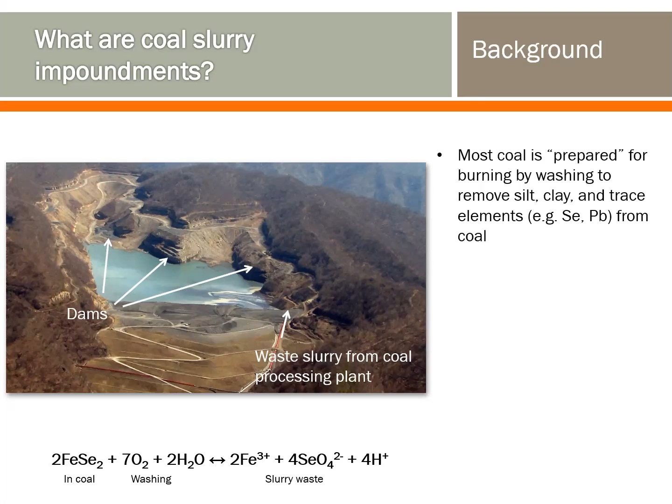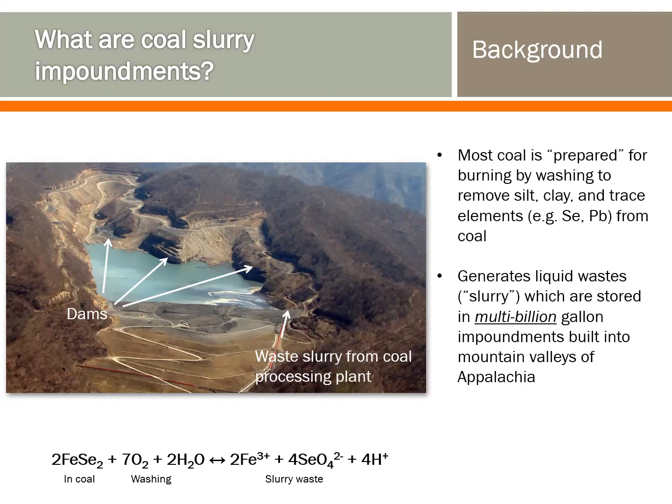And this whole process generates a huge amount of liquids, multi-billion gallons, which is easily set into these impoundments. So there are more than 700 impoundments in the Appalachian region of the USA, in particular Kentucky, West Virginia, Ohio, and Pennsylvania. Here you can see a satellite image of coal slurry impoundment positions in the USA.

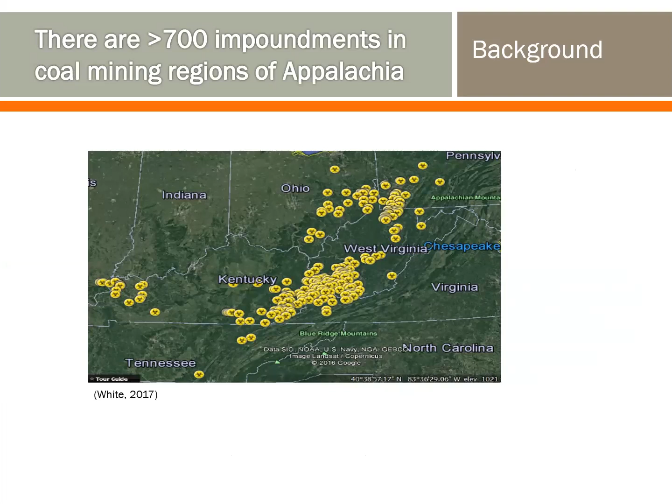So why do we care about these coal slurry impoundments? There is a photograph of West Virginia where you can see these impoundments are usually built very close to where we live. And these impoundments contain some bad elements like, for example, arsenic, selenium, and lead. Here I stated that the selenium is usually much higher than the water quality standard recommended by EPA for lotic systems, which is 3.1 ppb.

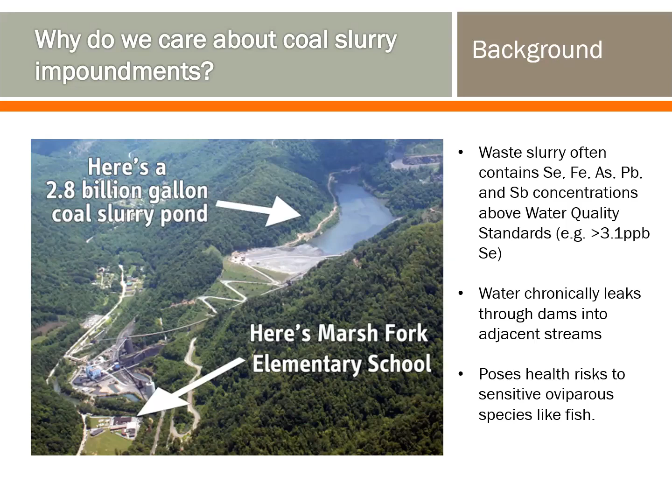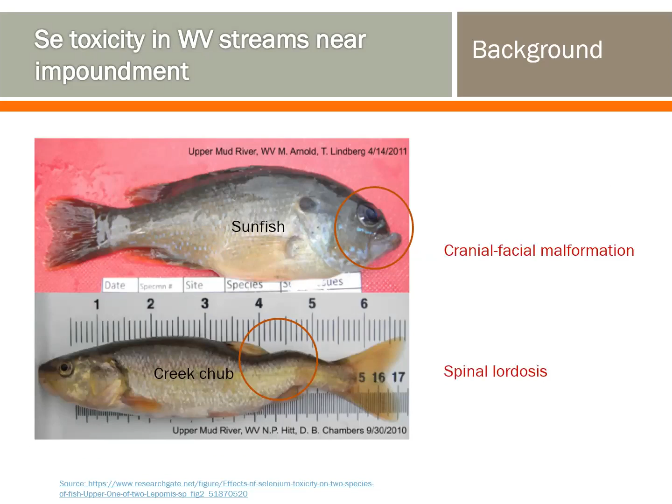Water chronically leaks through the dams into the adjacent streams, which usually poses health risks to sensitive oviparous species like fish and birds. Here is a photograph where you can see selenium-induced toxicity, more particularly due to oxidative stress, for sunfish and creek chub. We see facial and spinal malformation.

So what would be the possible solution for that? The PAB system, which has been used for more than 25 years to remove nitrate from agricultural tile drainage by denitrification. Here is a picture of the process, how in field conditions we can build a PAB system. Step one, excavate the trench and line it with an impermeable membrane. Step two, fill it with organic matter, for example, wood chips. We can use Timothy hay also. And cover with liner, and then cover with soil and vegetation.

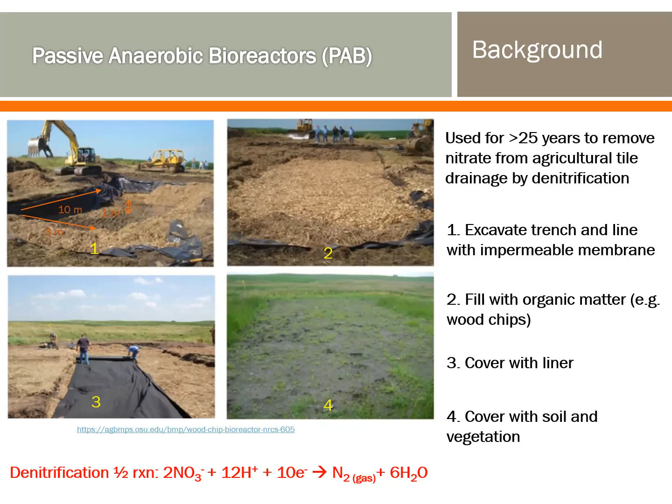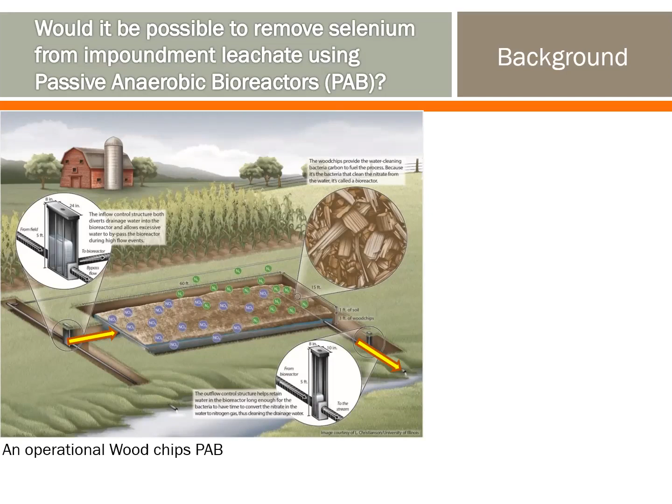Here is a nice illustration of an operational wood chip bioreactor. At the left yellow arrow, you can see the influent coming in, and at the right yellow arrow, you can see the effluent going out. The main advantages of this system are no energy and maintenance cost, minimal wildlife exposure, thermal insulation by soil, and year-round removal.

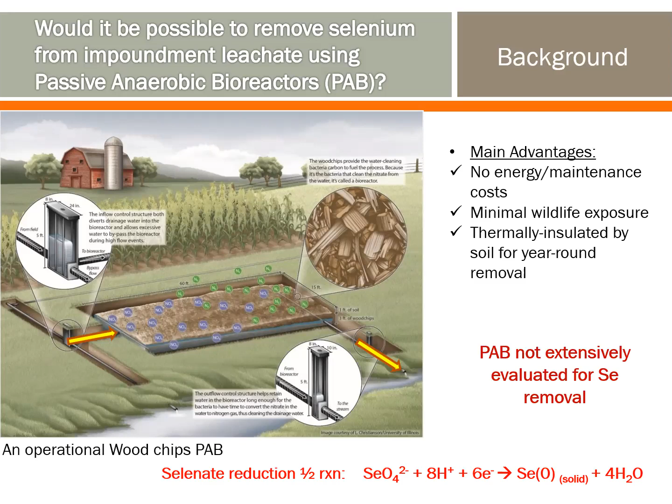So a similar system can be used to reduce selenate into elemental selenium, but this process hasn't been extensively evaluated for selenium removal. Dissimilatory selenium reduction could be a very good solution, which is a two-step process where selenate is reduced into selenite and then selenite is ultimately reduced into elemental selenium.

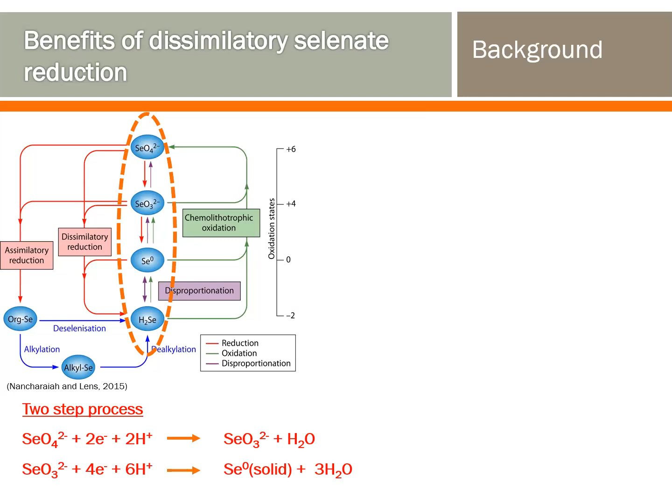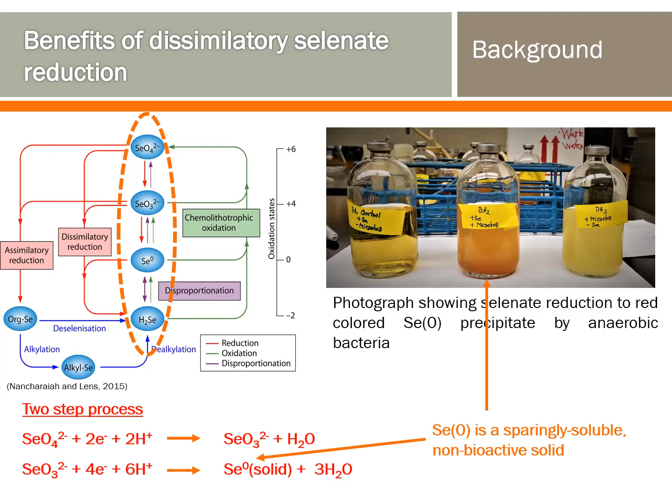Here is a photograph of this process, where I used the wastewater to see whether the wastewater of Kentucky contained selenium reducers or not. On the left, you can see the control, with no selenium and microbes. In the middle is selenium and microbes, and on the right is the microbes without selenium. You can see the red color, which is the elemental selenium, a sparingly soluble and non-bioactive solid.

A possible disadvantage is pollution swapping. Pollution swapping is the production of dissolved nutrients, organic carbon, trace elements, and greenhouse gases from the organic substrate in PAB, which could be detrimental to water and air quality.

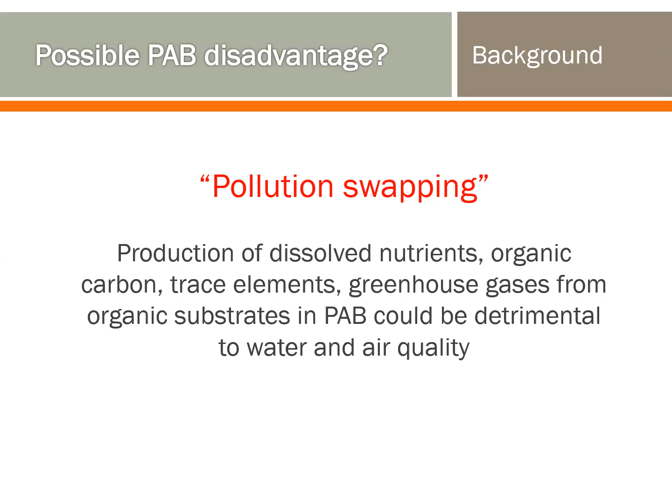The goals of my project were to evaluate the influence of organic substrates and maturation time on selenium removal rates in the PAB system, and to evaluate the influence of organic substrates and maturation time on production of greenhouse gases, nutrients, dissolved organic carbon, pH, and trace elements in the effluent of the PAB system, which is the pollution swapping. My hypothesis was that selenium removal rates and pollution swapping are significantly related to the type of organic substrate and maturity of the PAB systems.

To address this question, I built PAB systems using mason jars with 4 organic substrates and simulated coal slurry. The 4 substrates that I used were wood chips, switchgrass, miscanthus, and Timothy hay.

Over the 7 months, I have evaluated the chemistry of the solution, which is pH, Eh, selenium, and other elements by ICP-OES and ICP-MS. Thank you to Dr. Unrine for providing me the facility. Also, I evaluated the DOC, ammonia, nitrate, phosphate, sulfate, and TOC by TOC analyzer and colorimetry method.

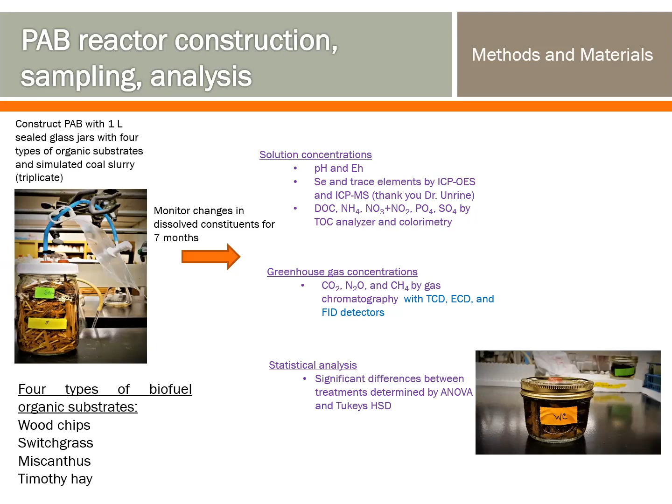Greenhouse gases have also been evaluated, which are carbon dioxide, nitrous oxide, and methane, using TCD, ECD, and FID detectors by gas chromatography. The statistical analysis has been done using ANOVA and Tukey, and the water quality indices have been done by comparing the concentration of my system with the pristine Appalachian streams to compute the overall water quality indices of PAB with different organic substrates.

Now, I have selected 12 parameters that could affect the overall quality of the effluent, and I chose the reference concentration to evaluate overall the effluent quality of my system. And this pristine concentration you're seeing is like the system which is not affected by the mining activity in the Appalachian region.

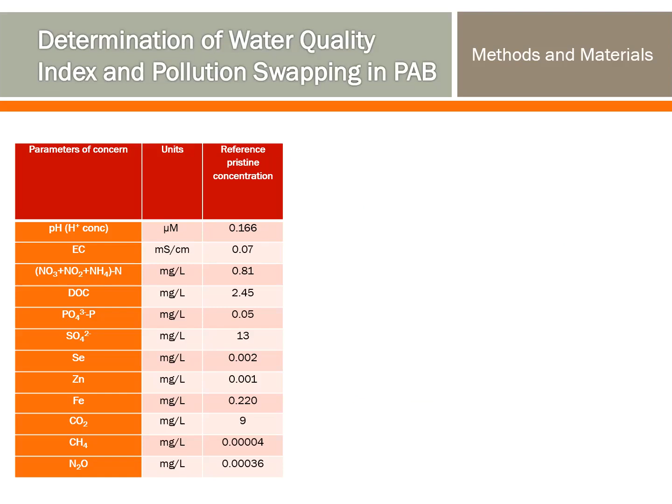To calculate the water quality index, I have used the Canadian Council of Ministers of the Environment Water Quality Index, which is the function of 3 factors. F1 is related to the number of parameters that fail, F2 is related to the number of total failures during the experiment, and F3 is related to the extent that failed parameters deviated from the guideline concentration.

To elaborate it more, if after calculating all the things I see that the score is 0 to 44, I categorize my effluent as poor, and if this is 95 to 100, then the effluent quality is excellent, which means that it's ready to release into the surrounding streams and it would not affect the aquatic life.

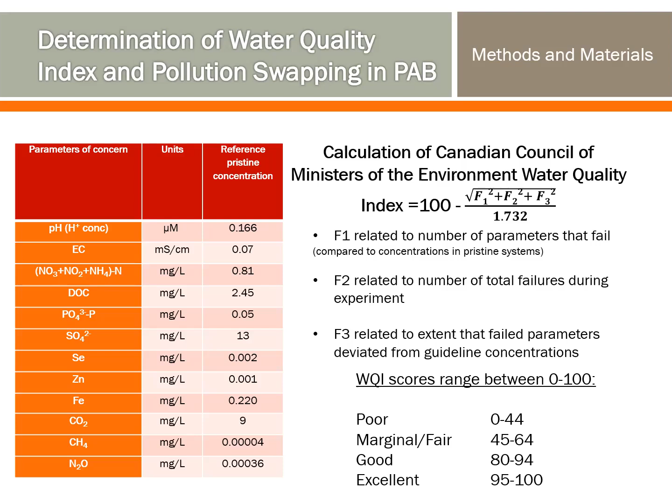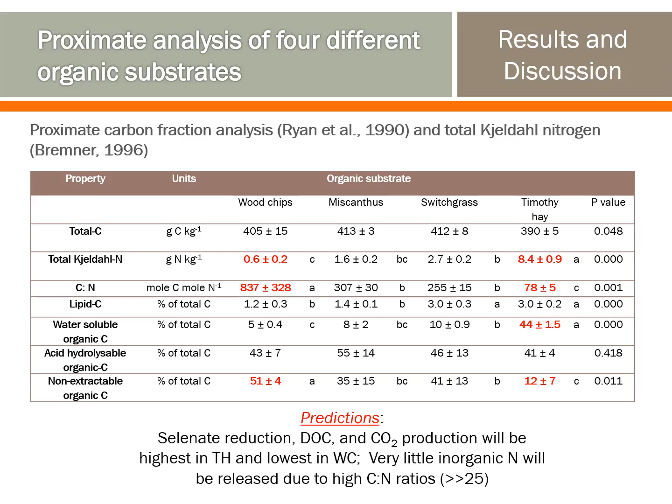You can see that the dissolved organic carbon concentration was significantly affected by the types of organic substrate in the PAB matrix. For example, the DOC was significantly higher in PAB with Timothy hay than other substrates. I just showed the table where you can see that the water soluble carbon is significantly higher in Timothy hay than other substrates, which is consistent with the DOC value that I found. DOC steadily declined with increasing maturation time and water replacements, due to a combination of leaching, dilution, and decomposition.

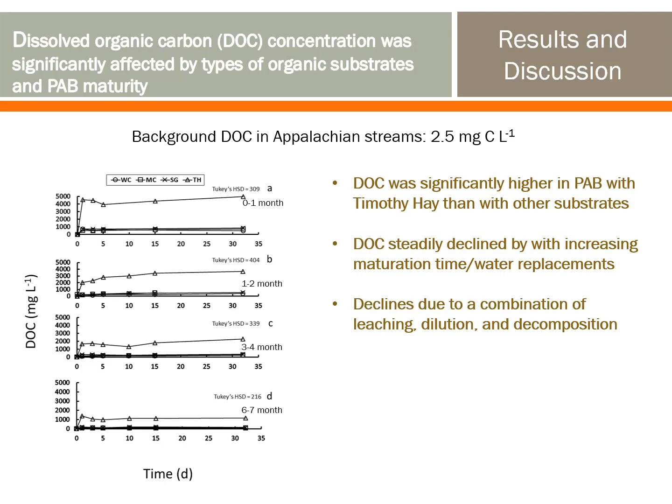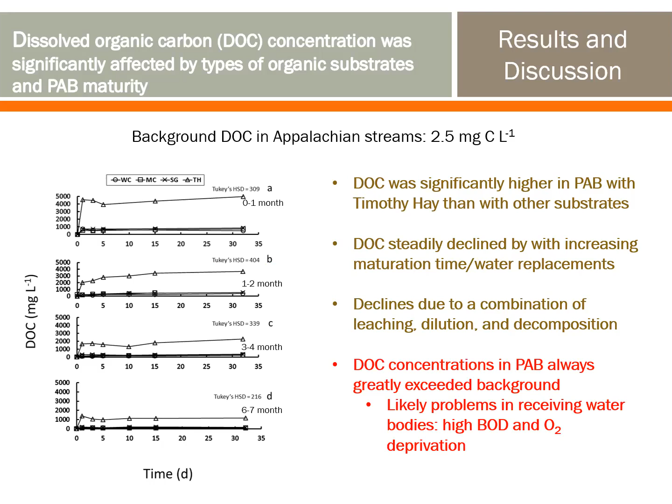And here you can see the background DOC in Appalachia at the top is 2.5 milligrams per liter. In my system, the DOC concentration of PAB always greatly exceeded the background. A likely problem in receiving water bodies is high BOD and oxygen deprivation.

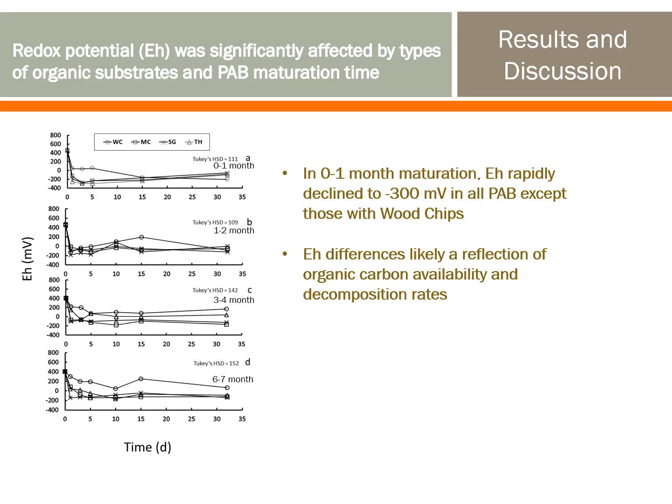Redox potential was significantly affected by types of organic substrate in PAB and maturation time. In 0 to 1 month, the topmost figure, figure A, shows that Eh rapidly declined to minus 300 mV in all PAB except wood chips. Eh differences are likely a reflection of organic carbon availability and decomposition rates. With increasing PAB maturation, Eh values tended to decline more slowly than in the initial maturation month and did not reach as low as the initial maturation month, which is figure A.

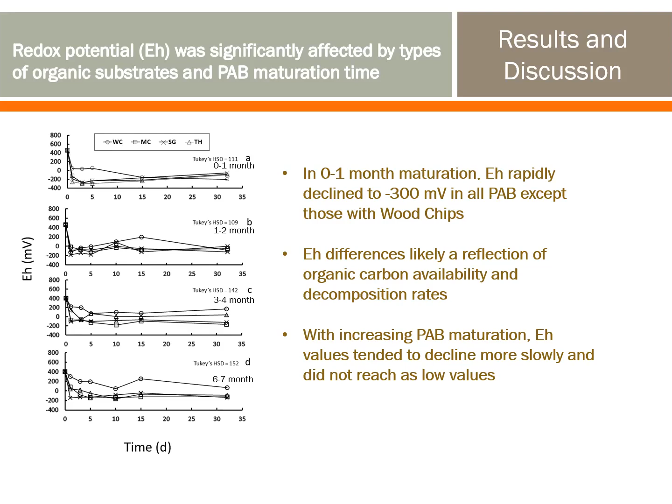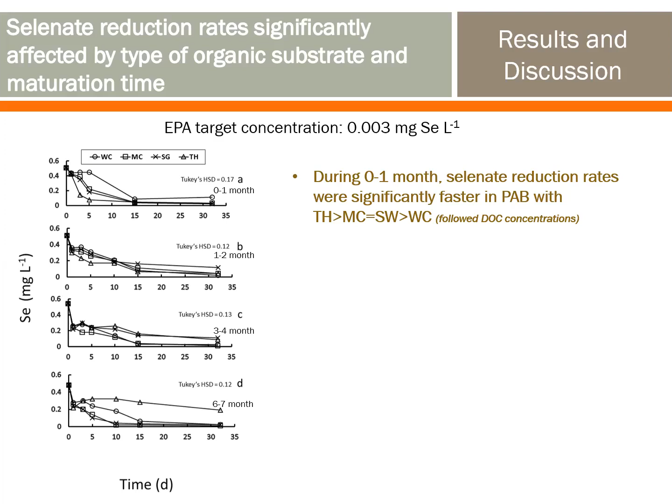During 0 to 1 month, which is figure A, the selenate reduction rate was significantly faster in PAB with Timothy hay, followed by miscanthus, switchgrass and wood chips. This followed the similar trend of DOC concentration. With increasing maturation time, the selenate reduction rates generally decreased in all PAB.

By 6 to 7 months, which is figure D, you can see an interesting thing happening here. The selenate reduction rate was significantly lower in PAB with TH than other substrates. I will elaborate on that later in my slides.

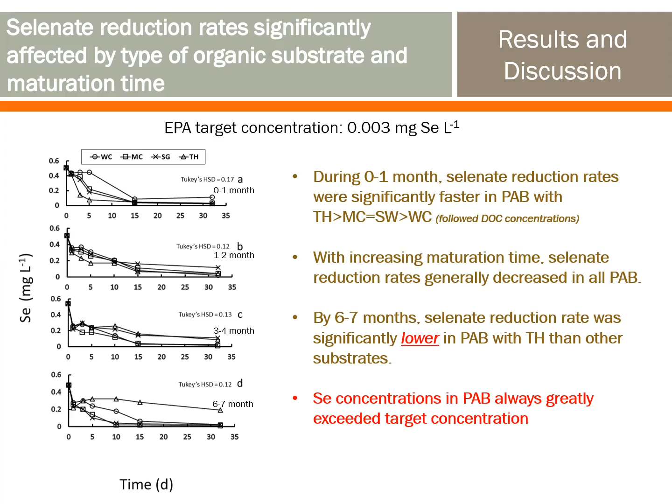And as you can easily see here, the selenium concentration in PAB always greatly exceeded my target concentration, which is 0.003 ppm. What are the possible reasons for this? One possible reason is electron donor availability. Again, the background carbon concentration in Appalachian streams is 2.5 based on my research efforts.

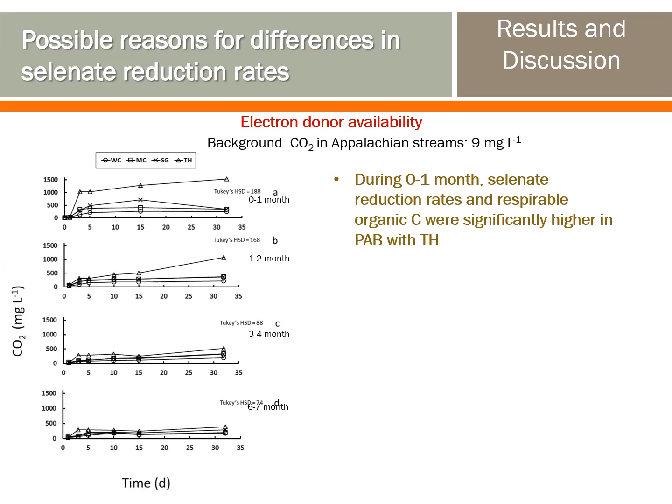During 0 to 1 month, the selenate reduction rates and respirable organic carbon were significantly higher in PAB with TH, which is Timothy hay. Selenate reduction rates and respirable organic carbon decrease with maturation time, as I changed the coal slurry with a fresh one at each maturation time. During 6 to 7 month maturation, low electron donor supply does not explain the lower selenate removal rates in PAB with Timothy hay compared to other substrates.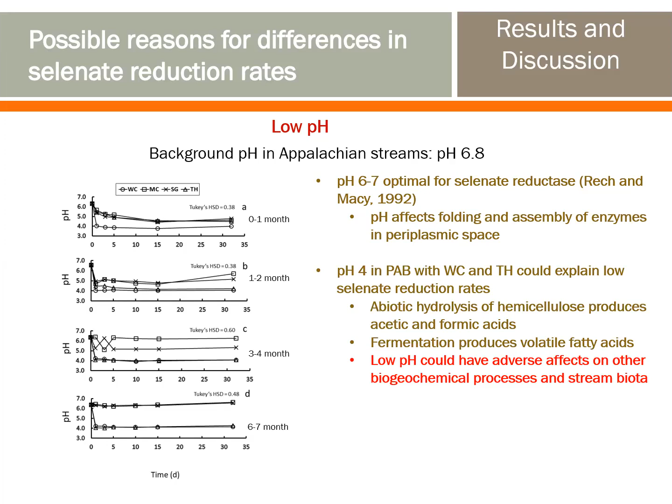This is also supported by my result, since pH affects folding and assembly of the enzyme in the periplasmic space. Here you can see the pH 4 in PAB with wood chips and Timothy hay could explain the low selenate reduction rates. But what could be the probable reason that wood chips and Timothy hay have low pH?

The probable reason is that abiotic hydrolysis of hemicellulose produces acetic acid and formic acid, and fermentation also produces volatile fatty acids. This low pH could have adverse effects on other biogeochemical processes and stream biota, for example denitrification. Here you can see where the pH affected denitrification, and also that different substrates have different pH at different maturation times.

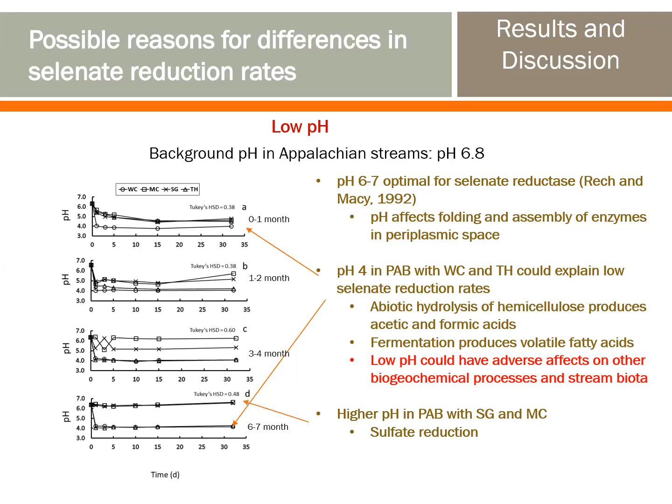But here you can also see that miscanthus and switchgrass have higher pH. The probable reason could be sulfate reduction, which I will discuss more in later slides. Another possible reason could be slow diffusion.

When I prepared my synthetic coal slurry, the initial concentration of selenate was 0.6 milligrams per liter. When the bulk solution concentration is 0.6, there could be a steep concentration gradient, so fast diffusion can happen, helping the selenate get into the periplasmic space of the selenium reducer cells where selenium reduction happens.

But after an incubation time of 15 days, the selenium concentration usually decreases to 50 ppb, which is 0.05 milligrams per liter, and a shallow concentration gradient or slow diffusion might happen. Therefore, the selenate removal rates at low concentration could be diffusion limited. A similar effect has also been found in nitrate removal systems.

Now, let's talk about nitrate removal in the PAB system. Nitrate was rapidly removed to near the detection limit in all PAB in about 10 days, which verifies the previous notion that the PAB system is good for nitrate removal. However, while the system can remove nitrate, it also contributes other pollutants, which, as I said in my previous slide, is pollution swapping. We should not just think about nitrate, since this process can contribute other pollutants.

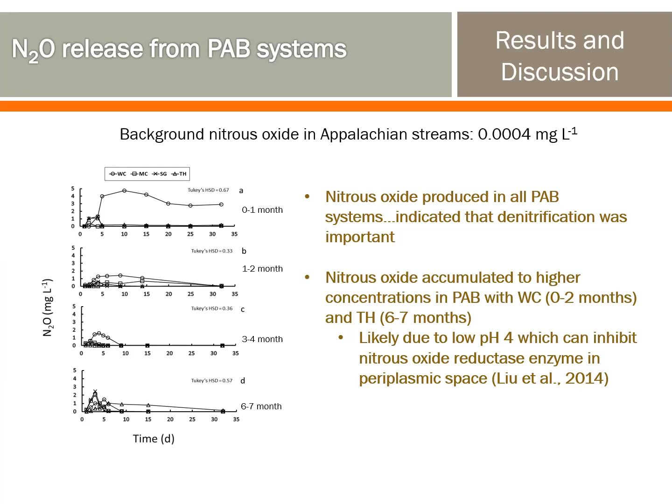You can see here, and likely due to the low pH, which can inhibit the nitrous oxide reductase enzyme in periplasmic space, similar to the selenate reductase enzyme. You can see the arrow here, the spike of nitrous oxide release. By day 15, during the 6 to 7 month period, nitrous oxide concentration in PAB with Timothy hay greatly exceeded the background.

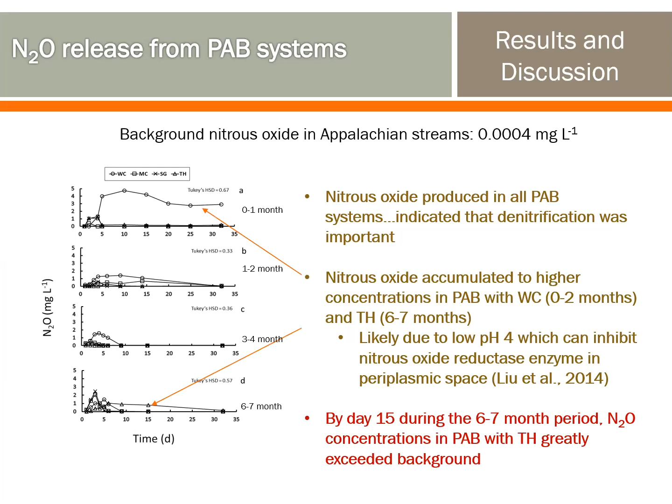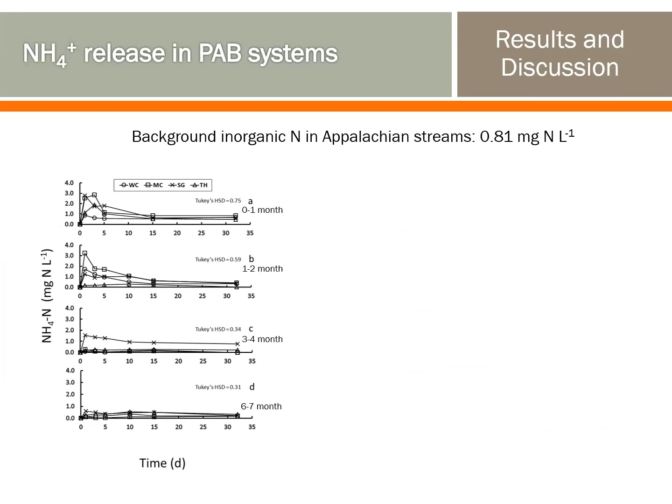Now, what happened to the ammonia? Again, the background inorganic nitrogen in Appalachian streams is 0.81. And we can see here that the ammonium produced right after replacement in all PAB systems during early PAB maturation periods indicated that DNRA, which is the dissimilatory nitrate reduction to ammonium, was probably important. And also the condition is favorable for that because the initial nitrate concentration is low.

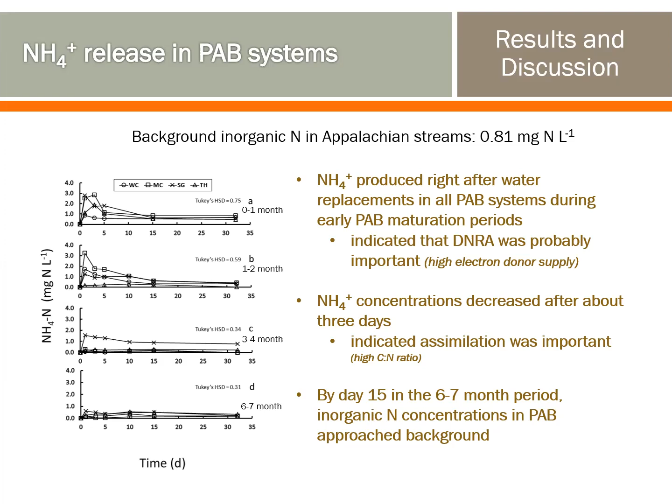When I prepared the simulated coal slurry, it's like 10 ppm, and it has high DOC also, as I just showed you, which is favorable for DNRA according to the literature I have read. And also ammonium concentration decreased after about 3 days, which indicated assimilation, which is also supported by my previous data because of the high C to N ratio. By day 15, in the 6 to 7 month period, the inorganic nitrogen concentration of PAB approached the background.

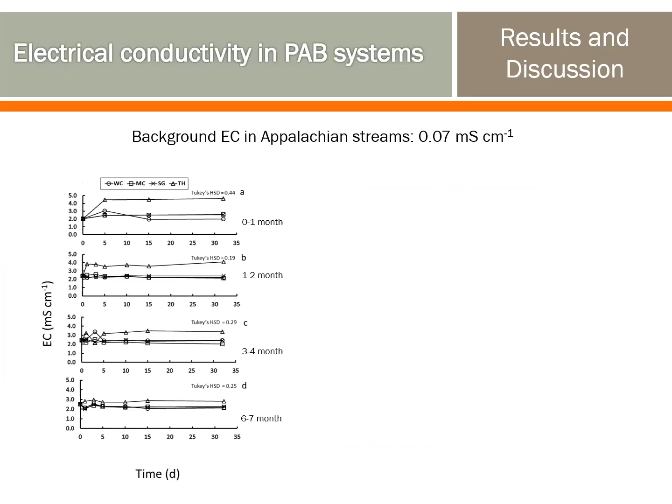Now, electrical conductivity. The background electrical conductivity in Appalachian streams, pristine systems, is 0.07 millisiemens per centimeter. Here you can see that the EC in the coal slurry is about 2 millisiemens per centimeter. The main ions in my electrical conductivity are sodium, calcium, magnesium, potassium, and also sulfate and chloride. The EC in PAB systems did not change or increased, especially for Timothy hay, where I found that the potassium is 42 times greater than synthetic coal slurry, and the magnesium and calcium are 5 times more than background coal slurry.

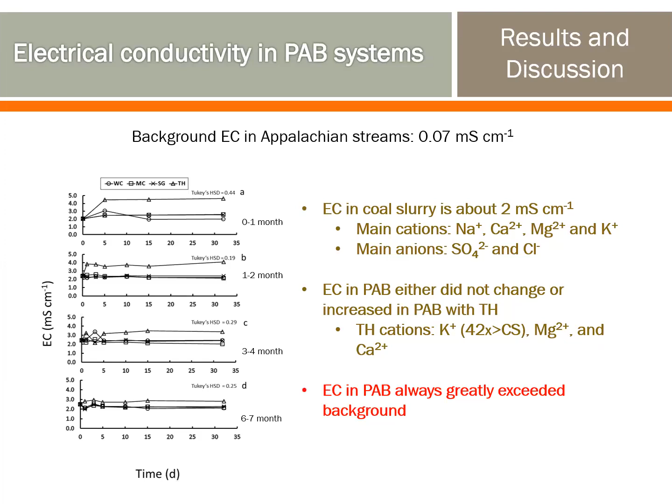The EC in PAB always greatly exceeded the background. Now, getting back to the interesting thing about sulfate reduction. The sulfate in Appalachian streams in pristine systems is 12.5, and coal slurry usually has more sulfate than Appalachian streams. As I mentioned here, the sulfate concentration in coal slurry is about 1,000 milligrams per liter. Similar to selenate and nitrate, sulfate reduction was also observed in the PAB with miscanthus.

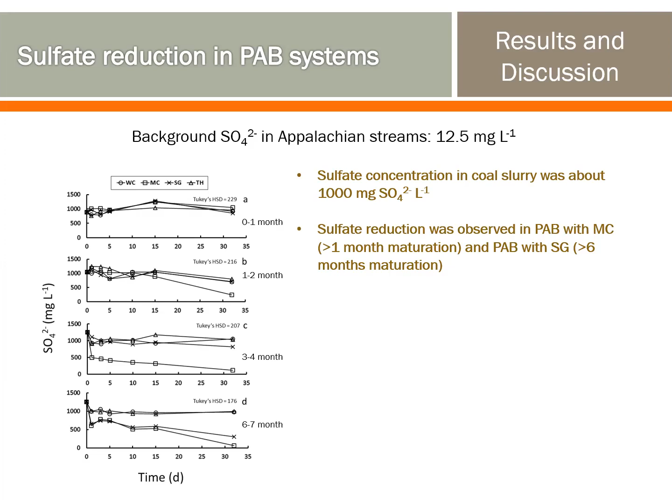After more than 1 month's maturation period, on the left side you can see the rectangle where the miscanthus is after the initial maturation period, which is A. Then you can see B, C, and D on the left side of the figure, that miscanthus is continuously showing that it can reduce sulfate also. And PAB with switchgrass in month 6, which is the cross sign here. Sulfate reduction was not observed in wood chips and Timothy hay.

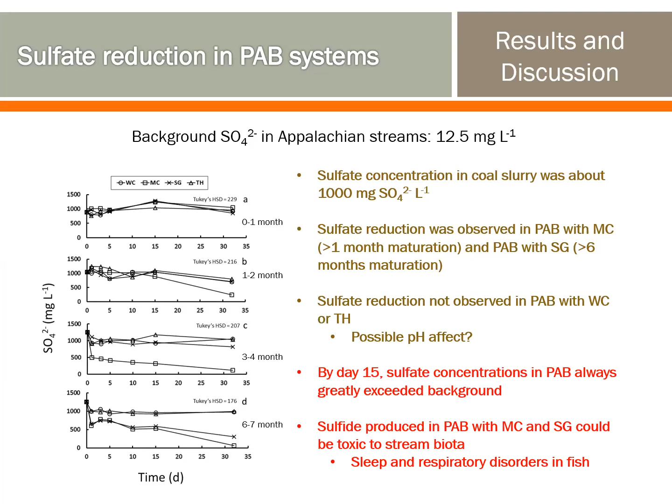A possible effect could be pH, because we know that for sulfate reducers in acidic conditions, the undissociated carboxylic group is very toxic for them. So sulfate reduction, which is a proton consuming process, is not as good as with the other substrates. So that's why you can see that sulfate reduction doesn't happen in wood chips and Timothy hay. By day 15, sulfate concentration of PAB always greatly exceeded the background. And the sulfide produced in miscanthus and switchgrass could also be toxic to stream biota, which might cause sleep and respiratory disorders in fish.

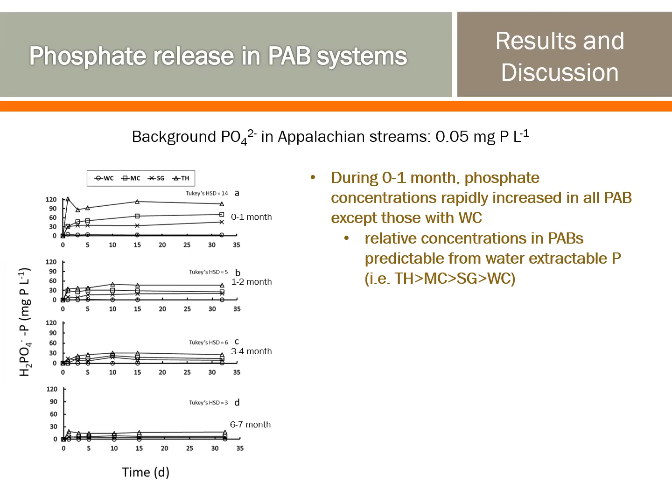Now, what happened to the phosphate? The background phosphate concentration in Appalachian streams is 0.05. During 0 to 1 month, in the left side figure 1A, you can see that the phosphate concentration rapidly increased in all PABs. The relative concentration in PABs is predictable from the water extractable phosphate that I also measured, where Timothy hay has the highest, followed by miscanthus, switchgrass, and wood chips. The phosphorus concentration decreased with increasing maturation time. By day 15, during 6 to 7 months of maturation, phosphorus concentration in PAB also exceeded the background, which might cause eutrophication in the receiving water bodies.

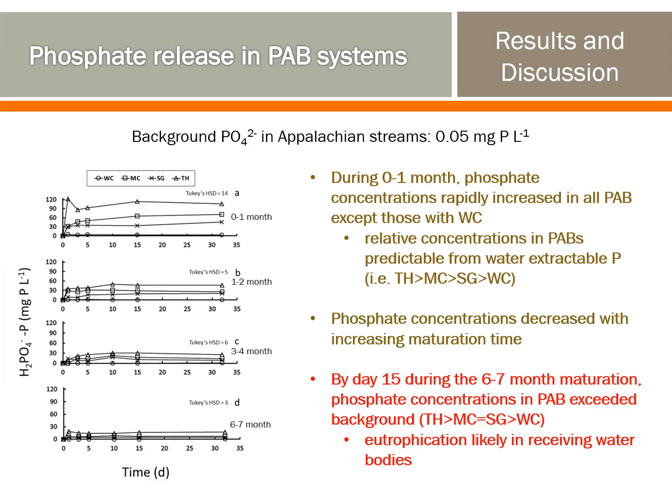Zinc concentration decreased with increasing maturation time due to leaching and slow decomposition of organic zinc, and also it could be zinc sulfide, because as I said, in miscanthus and switchgrass sulfate reduction happened, and the condition is good for zinc sulfide also. So it's possible that zinc sulfide can form in the system. During 6 to 7 months, zinc concentrations are below the background in all PAB except those with Timothy hay.

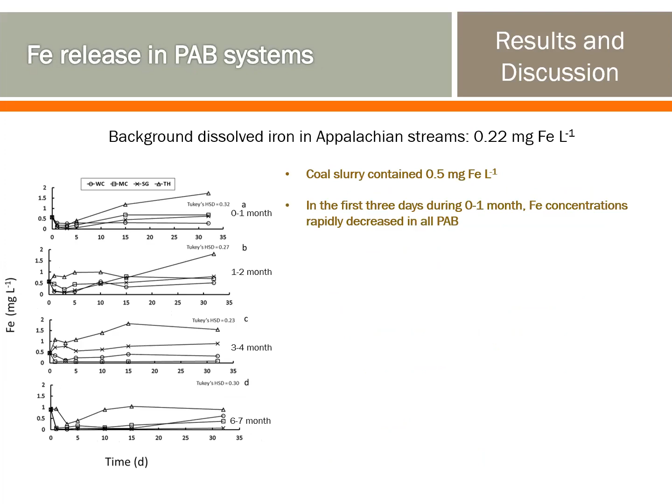Now, what happened to the iron? The background dissolved iron in the Appalachian pristine system is 0.22 milligram per liter. The synthetic coal slurry that I prepared contained 0.5. In the first 3 days, from 0 to 1 month, iron concentration rapidly decreased in all PAB. You can see in figure A the dip of iron concentration. The possible reason is likely that Fe3+ binds with lignin and cellulose, which is supported by the previous literature. And after 3 days, the iron concentration increased in all PAB.

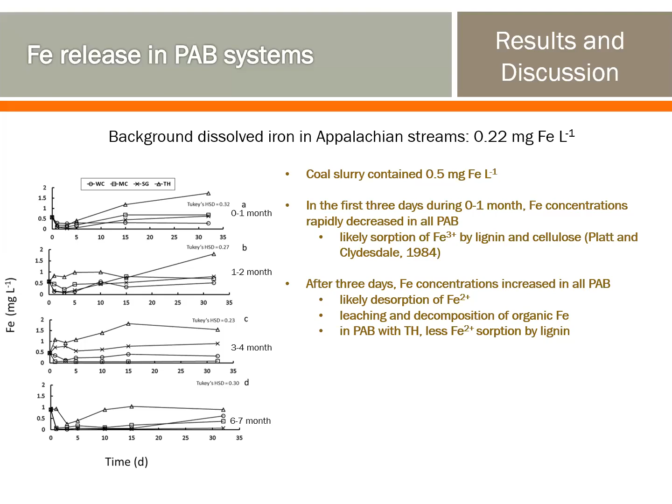The likely cause is desorption of Fe2+ and also leaching and decomposition of organic iron. In PAB with Timothy hay, there is less Fe2+ sorption by lignin. When I presented the proximate analysis, we saw that the lignin concentration is significantly lower in Timothy hay, and here you can see that in all months Timothy hay has higher release of Fe2+. So because lignin is lower in Timothy hay, you can see significantly high Fe2+ in the PAB with Timothy hay system.

By day 15, and in 6 to 7 months, the iron concentrations were highest in PAB with Timothy hay and wood chips and exceeded the background. So what could be the possible consequences of that? Fe2+ can get oxidized and consume the dissolved oxygen, and it can form iron oxyhydroxide, which can clog fish gills and create respiratory problems for fish.

The lower iron in PAB with miscanthus and switchgrass during the 6 to 7 month period could be because the iron can bind with sulfide, forming iron sulfide. That's why we see low iron concentration in miscanthus and switchgrass in 6 to 7 months, in figure D. Because sulfate reduction happened, the sulfide and iron might form a precipitate. That might be happening in switchgrass and miscanthus.

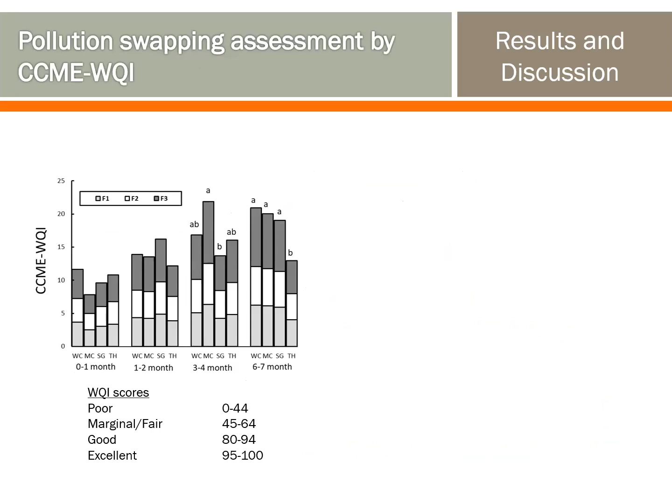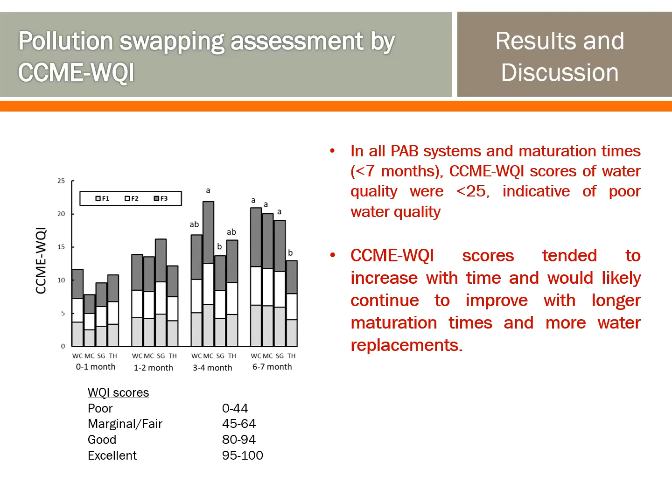Now let's evaluate. For overall evaluation of my effluent, I used the Canadian Council WQI, and by assessing that, I found that in all PAB systems, at all maturation times, the WQI scores of the water are below 25, which is categorized as very poor effluent quality. WQI scores tended to increase with time and would likely continue to improve with longer maturation time and more water replacement. However, it seems unlikely that the selenium target concentration could be achieved using the PAB system because it's significantly low.

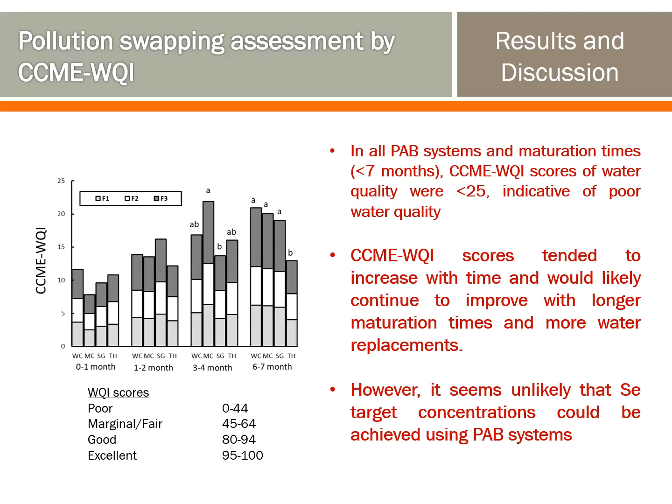Now, going back to my hypothesis, which is that the selenium removal rates and pollution swapping are significantly related to the type and chemical composition of organic substrate and the maturity age of the PAB system. I found that the selenium removal rates were significantly related to the type of organic substrate and maturity age of the PAB system. The key factors are organic carbon availability, pH, and selenium concentration. Pollution swapping is also significantly related to the type of organic substrate and maturity age of the PAB system. Some pollutants of concern are selenium, DOC, phosphate, and sulfate in all PAB, and also iron in wood chips and Timothy hay.

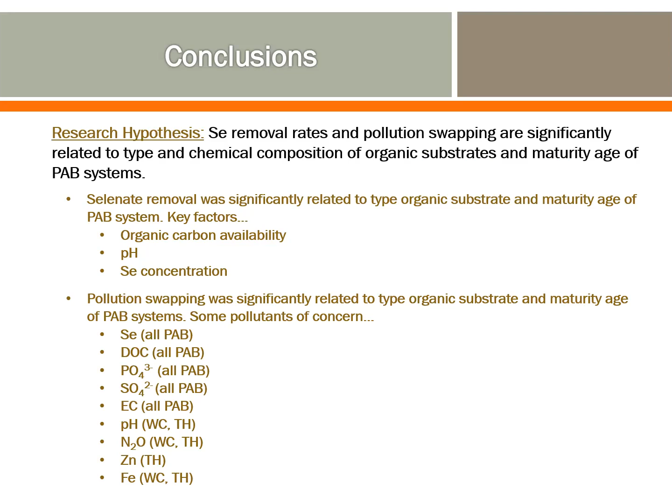Now, based on what I learned in this project, I'm recommending something that could be very beneficial for other researchers. The selenium target concentration was not achieved with the PAB treatment technology, so at this time it is not recommended to implement it in the field.

But I have an idea that lower sulfate concentration might increase the overall removal process, because selenate reductase needs molybdenum, and based on the literature I found, high sulfate concentration sometimes hinders molybdenum incorporation into the selenium reducers, and the selenium reducers need molybdenum to activate the selenate reductase enzyme. So my idea is to remove sulfate first, and then follow the same remediation technology to see whether it can reach the EPA limit, which is 3 ppb.

The PAB systems were very effective for nitrate removal, as I showed you, but they can contribute many pollutants, as I also showed you. Yes, it is very effective for nitrate removal, but it can contribute other pollutants also. So I'm saying that we should use this technology with more caution.

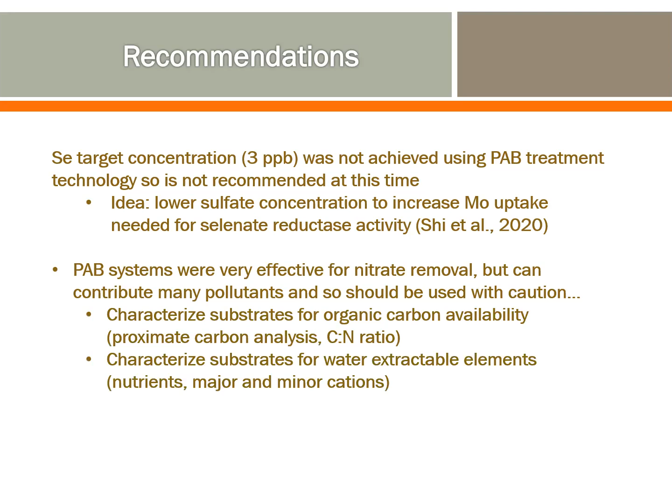I'm recommending to characterize the substrates for organic carbon availability by proximate analysis and C:N ratio, and characterize the substrate for water extractable elements, especially nutrients, major, and minor cations.

An alternative plan that also can be done for disposing of the PAB effluent during the early maturation times is mine land reclamation, because you can see that the effluent is nutrient rich. It has more nutrients, so we can use this effluent for mine land reclamation as a liquid fertilizer also. The second use for this nutrient rich effluent would be crop irrigation water. So this is my recommendation.

It was well explained. I want to learn more about your future plan about sulfate reduction to increase the availability of molybdate in the system and ultimately increase selenate reduction. Could you please elaborate on this? Actually, it's in the recommendation section. Let me share that first. Can you see my slides right now? Yes, I can.

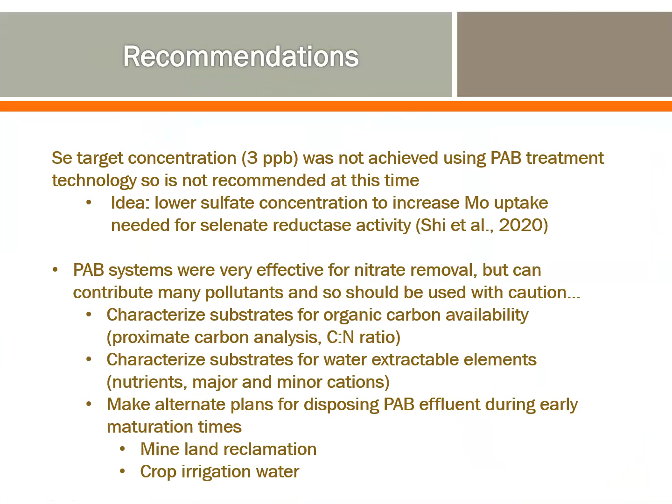Based on the literature, I found that molybdenum insertion into the microbes is inhibited by high sulfate concentration. I already finished my project, but it would be nice if I were able to remove the sulfate first, then do the same process and see whether the microbes can reduce it to 0.003. I'm not sure it can reach that point, but it's possible, because in my system I reached on average 50 ppb, so it could be reduced further to reach the EPA guideline, which is 3 ppb.

So my suggestion would be to precipitate out the sulfate by using barium chloride, then follow the same treatment and see whether it can reach 3 ppb, as guided by the EPA. Hope this answer gives you what you are seeking. Okay, thank you for your explanation. You're welcome.